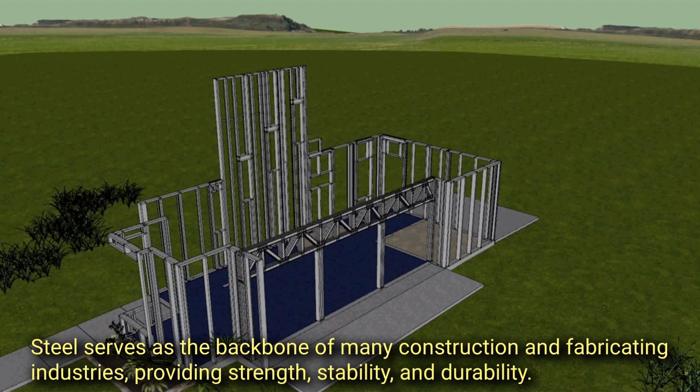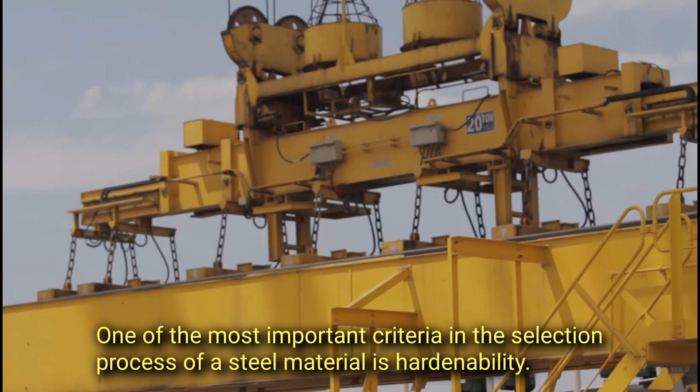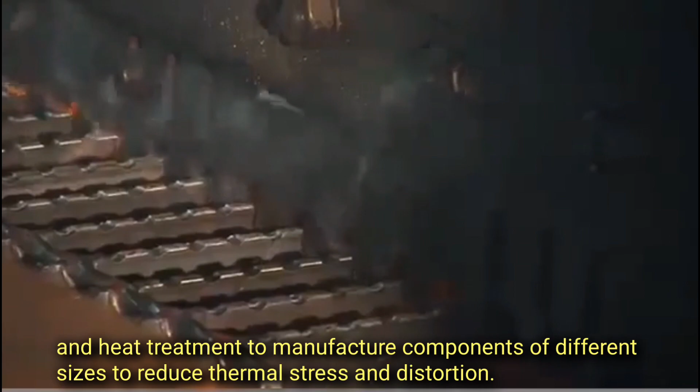Steel serves as the backbone of many construction and fabricating industries, providing strength, stability, and durability. One of the most important criteria in the selection process of a steel material is hardenability. Knowledge about the hardenability of steel is necessary to be able to select the appropriate combination of alloy steel and heat treatment to manufacture components of different sizes to reduce thermal stress and distortion.

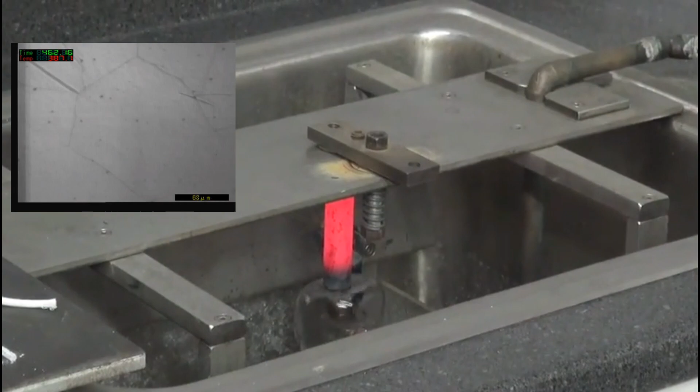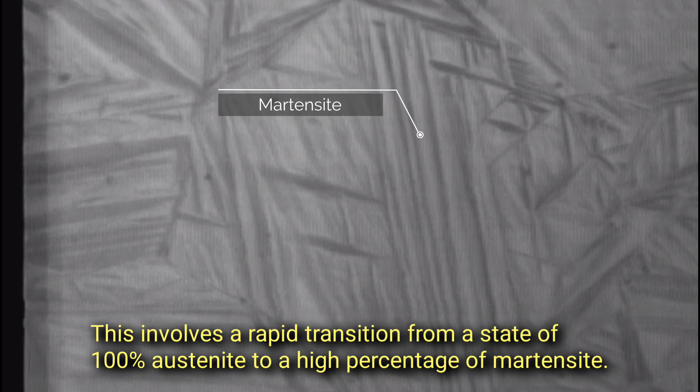What is the hardenability of steel? The hardenability of steel is the ability of steel to partially or completely transform from austenite to martensite when cooled in a given quenching medium. This involves a rapid transition from a state of 100% austenite to a high percentage of martensite. Hardenability is the property that measures the depth and distribution of hardness by the formation of martensite in the steel upon quenching from high temperature.

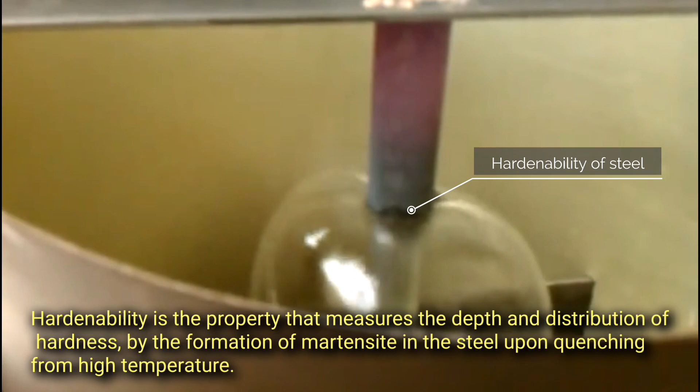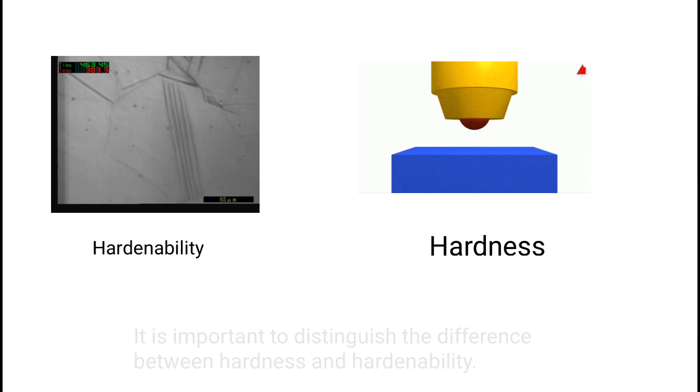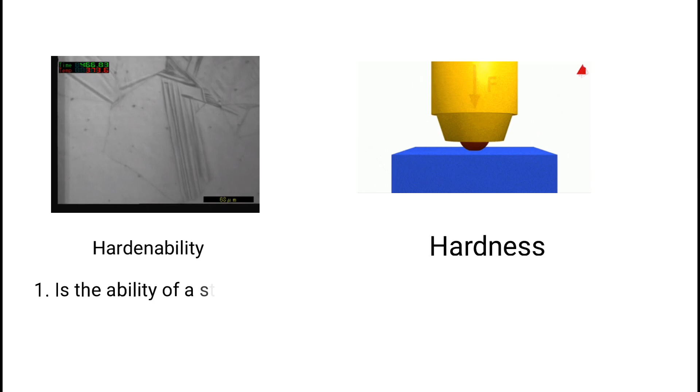Note: hardenability should not be mistaken for hardness. It is important to distinguish the difference between hardness and hardenability. Hardness is the measure of a material's resistance to indentation or deformation. It is applicable for materials or metals, while hardenability is the ability of a steel to form martensite by quenching. It applies to steel only.

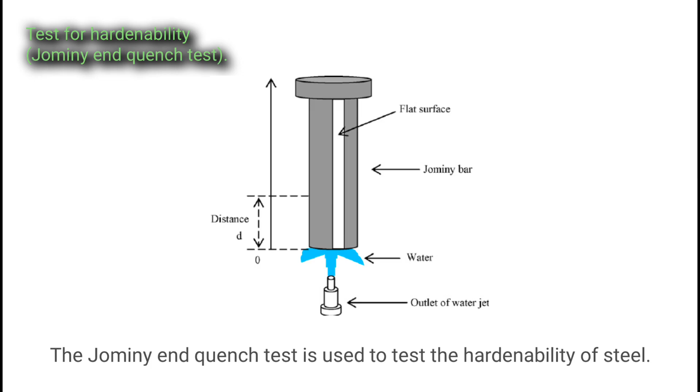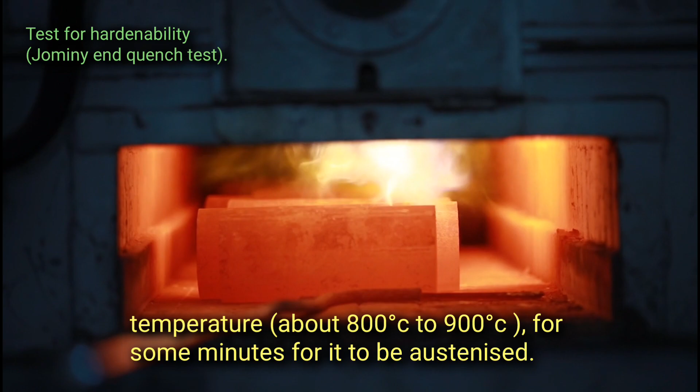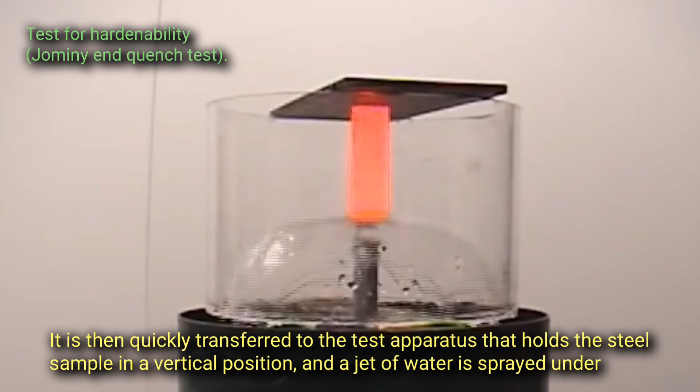Test for hardenability. The Jominy end quench test is used to test the hardenability of steel. In the end quench test, a steel sample that has been normalized and machined to eliminate decarburized surface is heated to the austenitic temperature, about 800 to 900 degrees Celsius, for some minutes for it to be austenized. It is then quickly transferred to the test apparatus that holds the steel sample in a vertical position, and a jet of water is sprayed under controlled conditions at the bottom end of the sample.

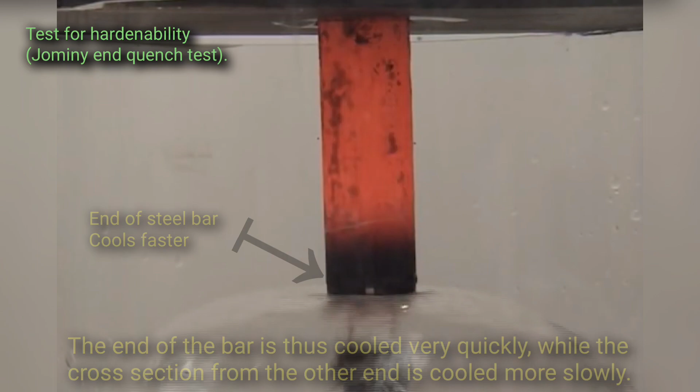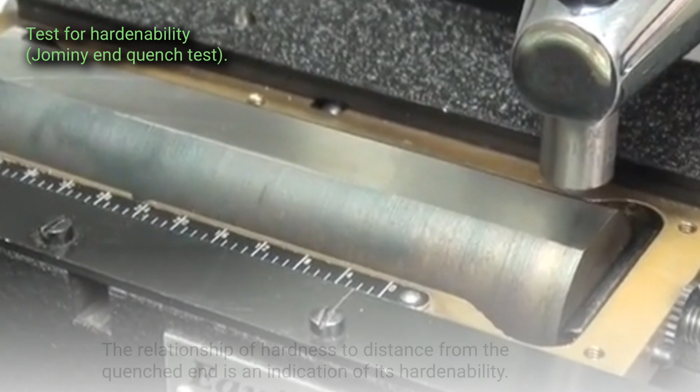The end of the bar is thus cooled very quickly, while the cross-section from the other end is cooled more slowly. The cooling rate varies along the length of the sample. After cooling is completed, the hardness is measured at intervals from the quenched end. The relationship of hardness to distance from the quenched end is an indication of its hardenability.

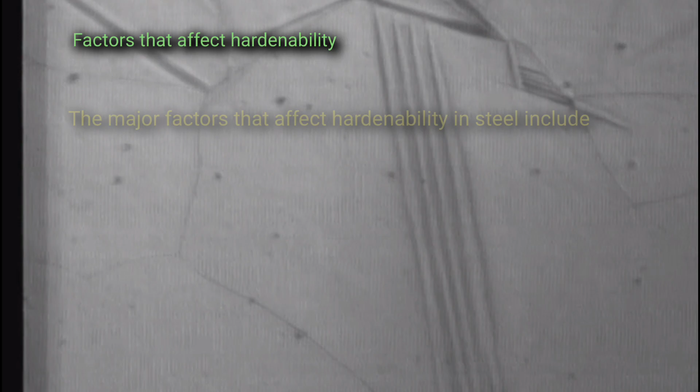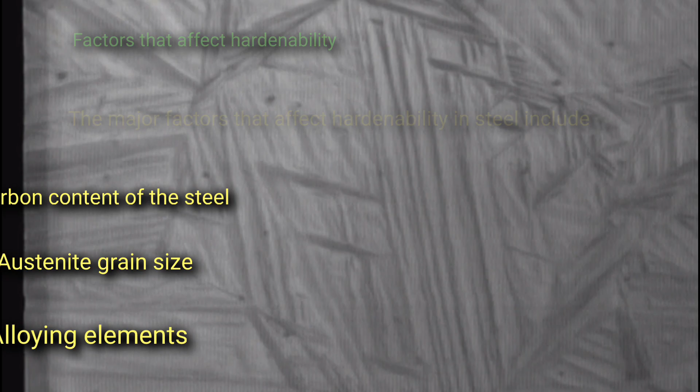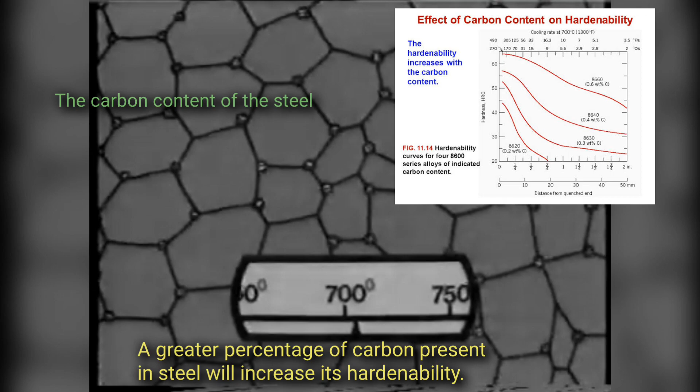Factors that affect hardenability. The major factors that affect hardenability in steel include: 1. Carbon content of the steel. 2. Austenite grain size. 3. Alloying elements. The carbon content of the steel. Carbon controls the hardness of the martensite. A greater percentage of carbon present in steel will increase its hardenability. It increases the hardenability by hindering the formation of pearlite and ferrite. Increasing the carbon content makes the steel harder and stronger but less ductile.

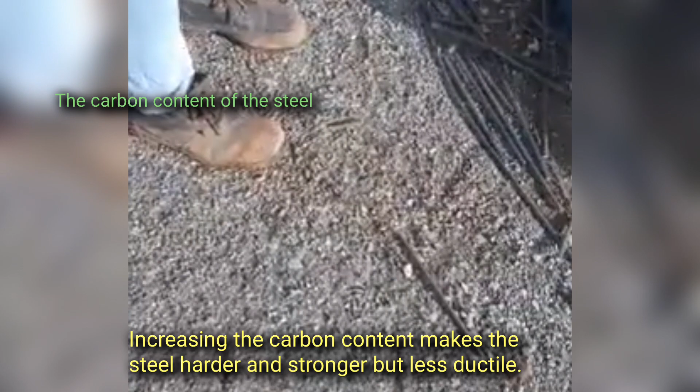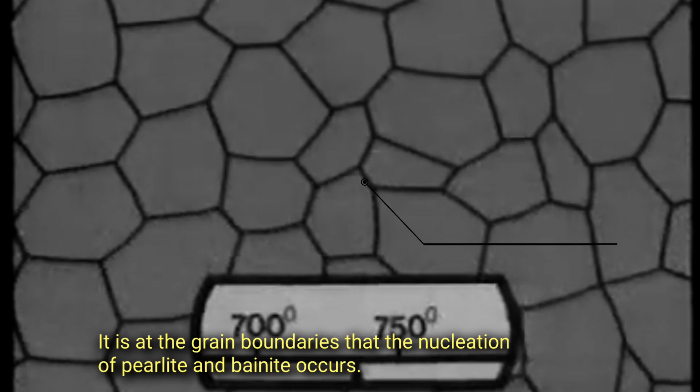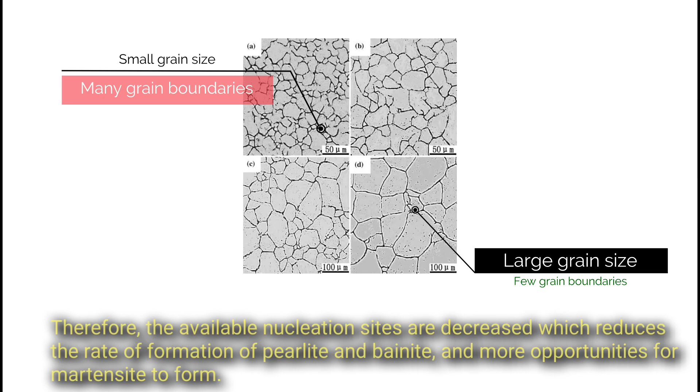Austenite grain size. An increase in austenitic grain size increases hardenability. It is at the grain boundaries that the nucleation of pearlite and bainite occurs. An increase in the austenitic grain size will lead to fewer grain boundaries. Therefore, the available nucleation sites are decreased, which reduces the rate of formation of pearlite and bainite, and more opportunities for martensite to form.

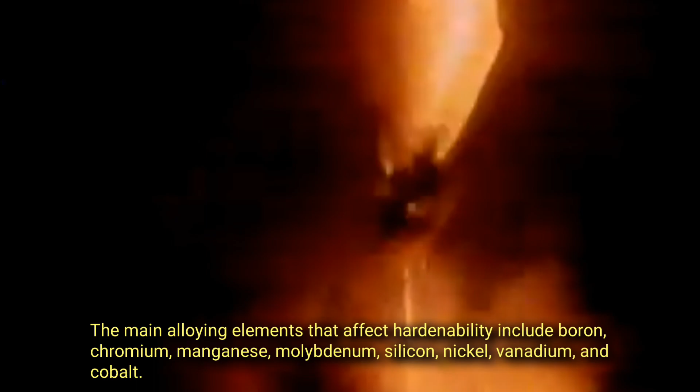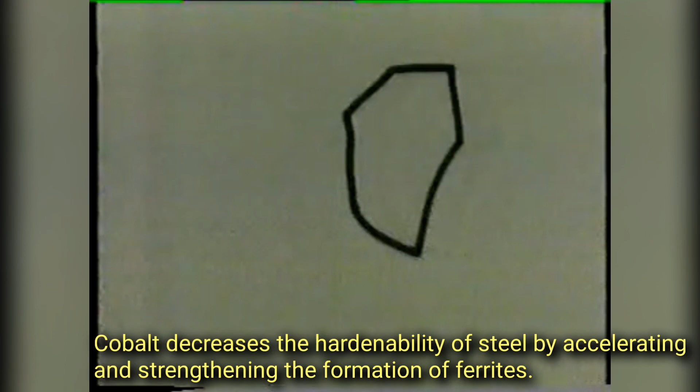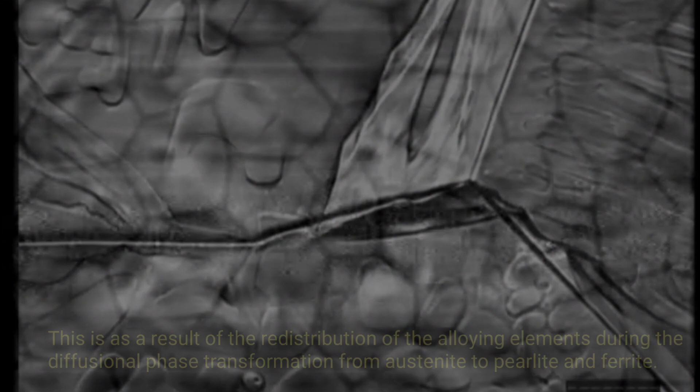Alloying elements. The main alloying elements that affect hardenability include boron, chromium, manganese, molybdenum, silicon, nickel, vanadium, and cobalt. The addition of alloying elements increases hardenability except for cobalt. Cobalt decreases the hardenability of steel by accelerating and strengthening the formation of ferrite. The other alloying elements increase hardenability by preventing phase transformation from austenite to ferrite and pearlite. This is a result of the redistribution of the alloying elements during the diffusional phase transformation from austenite to pearlite and ferrite.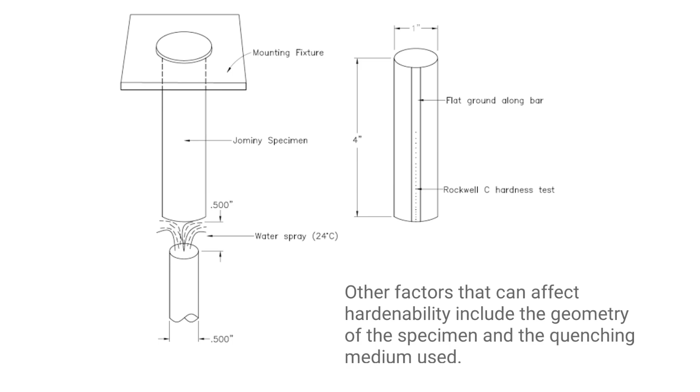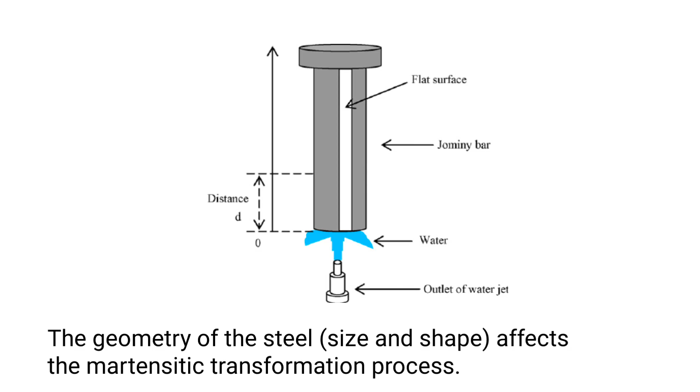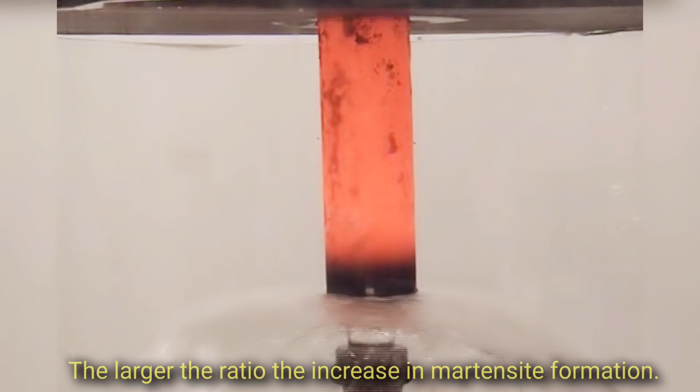Other factors that can affect hardenability include the geometry of the specimen and the quenching medium used. The geometry of the steel, that is the size and shape, affects the martensite transformation process. The rate at which the interior of the specimen cools is dependent on its surface area to volume ratio. The larger the ratio, the greater the martensite formation. The type of quenching medium also affects hardenability. Using water, oil, or air will produce different hardness in the interior of the workpiece, although water is usually the medium of choice.